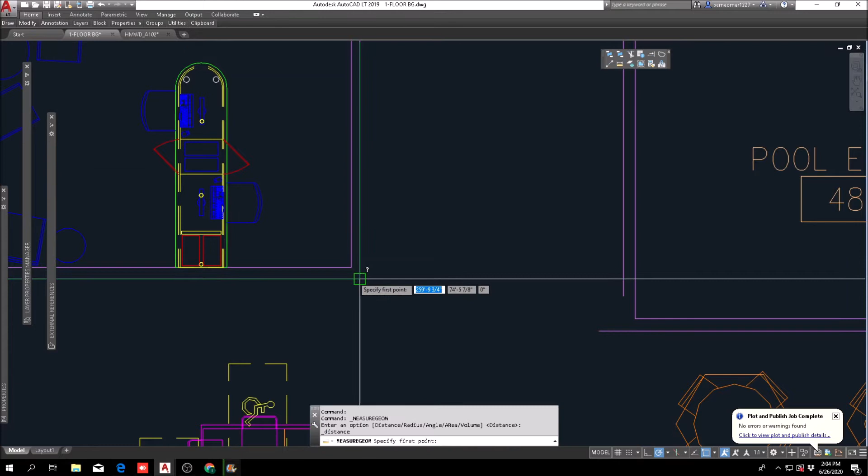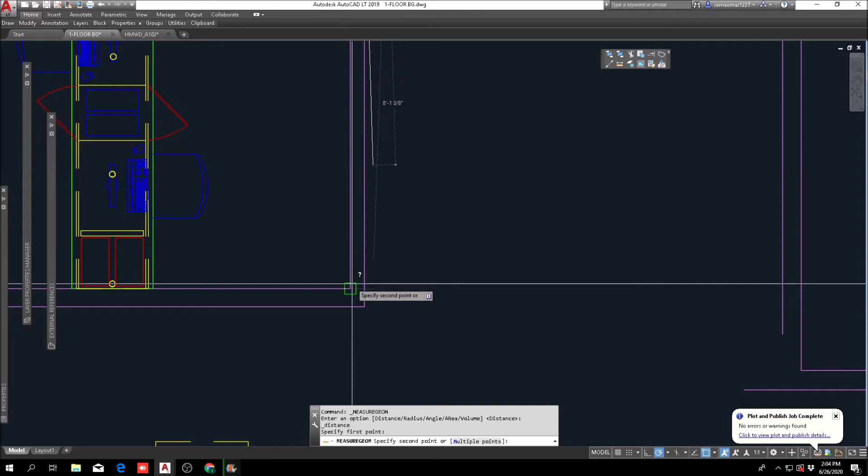One of the things also, whenever you get drawings for the prototype, you want to check the dimensions, because most of the time the prototypes draw sheetrock and everything, and those dimensions are kind of weird. If you keep them, it might have an eighth of an inch or 16ths or 17/16ths or whatever. Like in this case, it's 12 and an eighth. So you don't want to do that.

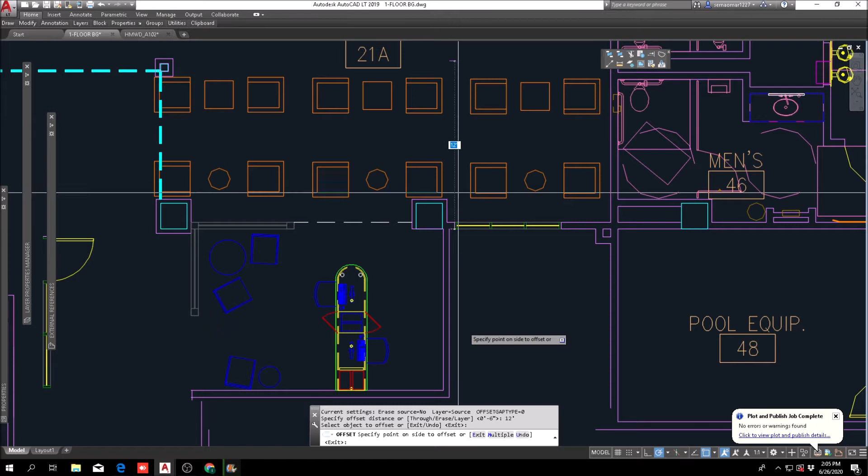You don't want to have weird dimensions. You want to round it up to an inch or to a foot or whatever. So in this case it'll be 12 feet. Just offset it, and just adjust that dimension in there, or just adjust that wall there. Like I said, you don't want to have eighths of an inch or stuff like that. So the prototype is just a guide.

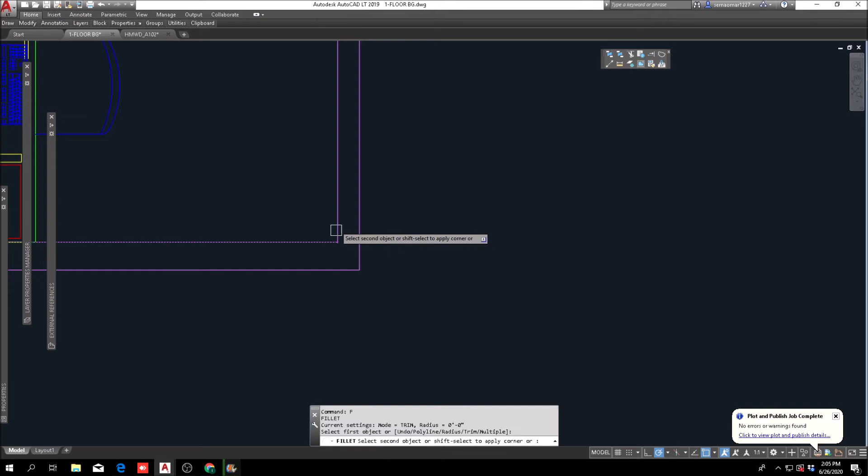So if the prototype says that they want something clear, then you're gonna have to figure out all the sheetrock that you're gonna put, and it depends on what kind of structure you're using. But you want to draw to the stud. You don't want to draw to the sheetrock. A lot of people do that, which is totally wrong, because in the field you're not gonna be measuring to the sheetrock or to the finish.

Whoever is doing the framework, the first thing they're gonna do is snap a line on the foundation, and that's where they're gonna put the stud, either the wood stud or the metal studs. But nobody's gonna go through all those walls trying to figure out all those dimensions of the sheetrock. That's totally wrong. I know a lot of architects do that because they just get the prototype, and then they just print it out like that, or they don't adjust it to work with studs.

So a lot of the times they have a lot of dimension problems in the field, or sometimes they don't even dimension the walls, they just dimension the center of the wall, and that makes it easier for the contractor to make a mistake. They expect all the framers to dimension to that center of the stud, and then calculate where's the center, and move the wall here and there. But the right way to dimension, you dimension to one side of the stud all the time, not of the wall, not of the finished wall, but of the stud.

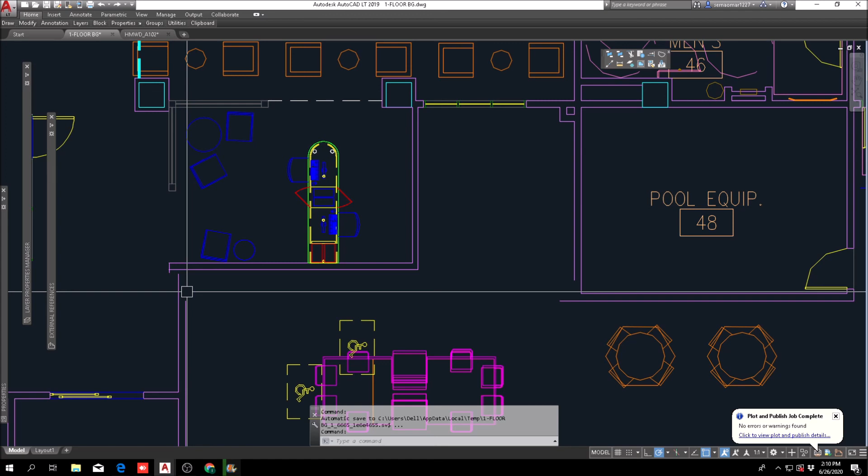And in the prototype, they sometimes put all the layers of the sheetrock, so the wall might not be exactly where it needs to be. So once again, you're gonna dimension to the stud. That's the right way to do it. A lot of people dimension to the finish, but once again, put yourself in that condition. Are you gonna be able to figure all of that? Are you gonna have a calculator next to you, or be adding and subtracting how many inches or how many layers you're gonna put? No, of course not. So that's why you always have to dimension to the stud, or to the structure.